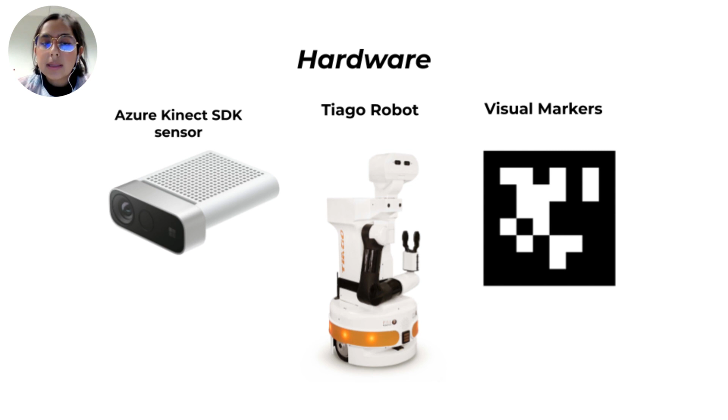Basically, the main objective for this project consists on grasp or manipulate objects with the hand of the robot, estimating the robot hand and target pose using visual markers and the Azure Kinect sensor. The hardware implemented for this project was the Azure Kinect SDK sensor, the Tiago robot, and several visual markers. For the software, what we implement was Docker with Ubuntu, ROS Noetic, and the April tag library.

Also, 4 stages were developed for this methodology. The first stage consists on the improvement of the marker detection, then the robot hand pose estimation using the previous improvement of the marker detection, then the design of a controller to reach different target points, and finally, the object manipulation, basically designing a state machine to design the motion planning.

Visual marker detection improvement was made using the AprilTag ROS wrapper and the Azure Kinect ROS driver. So basically, with these tools, I am able to obtain pixels of each corner of each tag detected. So the position improvement was made by obtaining X, Y, and depth camera frame coordinates, making a partial reconstruction of the point cloud, using depth information of each corner and the intrinsic camera matrix values.

For the orientation improvement, the rotation matrix is obtained by using the cross product between V1 and V2, which are vectors that are obtained from the X, Y, and Z camera frame coordinates from each tag. So basically, with this process, it's possible to have an improvement of the pose of each tag that is detected, but also it is needed to implement a low-pass filter for those cases in which the tag is not detected or in the case in which the detection of the tag is wrong. So this process gives a good accuracy and performance of the tag data.